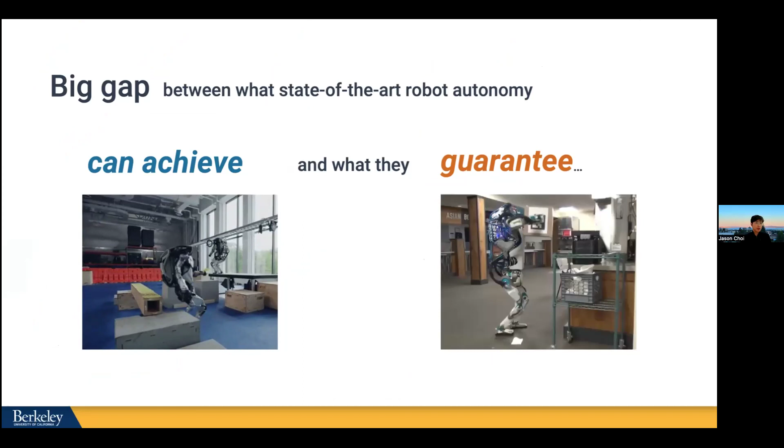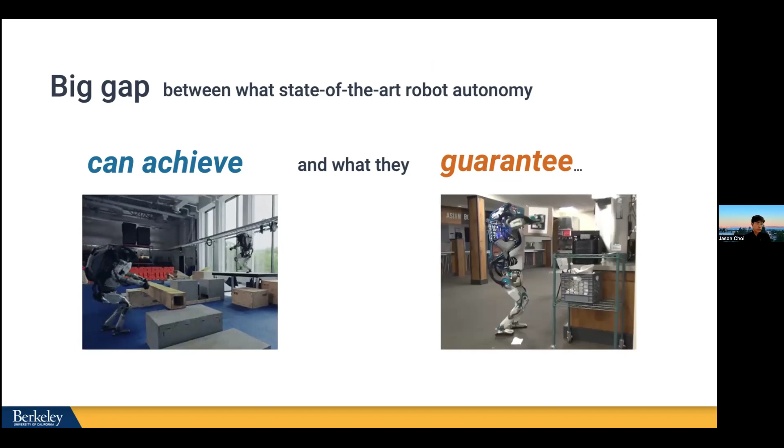I've heard that designing safe controllers is actually one of the main themes of your class, so I won't spend too much time on motivation. But I want to highlight that the main reason I investigate safety problems for robot autonomy is because state-of-the-art autonomy achieves a lot of cool tasks, but still lacks a lot of guarantees. It's a little unfair to use a Boston Dynamics video to highlight this, since it's a bit obsolete now, but it still makes my point: people spend a lot of time developing controllers for tasks that can be really versatile, but even then, we lack tools that provide rigorous guarantees for these systems. That's the main motivation for investigating safety problems in robot autonomy.

What is special about modern robot autonomy systems compared to classical control systems? There are many aspects—for example, interaction with the environment or other agents is also a central topic of Andrea's class. But today I want to highlight two points: first, that new robot autonomy usually deals with more complicated and uncertain dynamics, like robots or modern next-generation aircraft.

They also usually involve a lot of data-driven components in their pipeline. Data-driven components are more common for prediction and perception, but I think it'll be essential to incorporate them into the control or decision-making part of autonomy as well—I'll talk more about that later. But assuring safety for data-driven control methods is still an underexplored area, which is why research on providing safety guarantees for robot autonomy is a really challenging and timely topic.

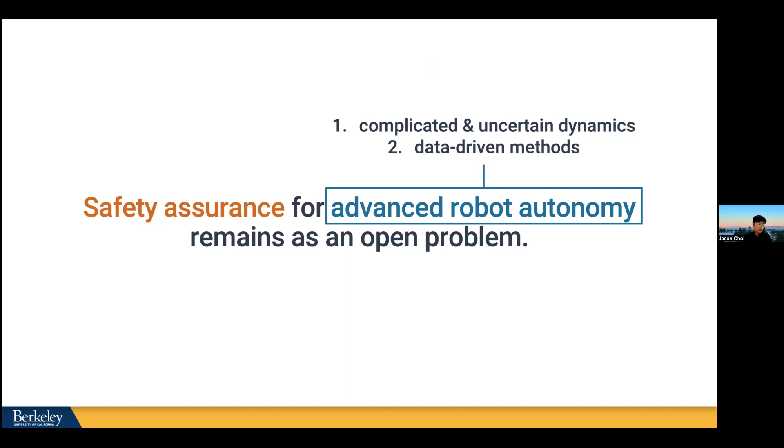My talk is divided into two parts. The first is more tutorial-like, and the second is more research-focused. In the first part, I'll go through various methods of control-theoretic design of safety filters, but due to time limits, I'll mainly focus on control barrier functions, since I've heard Andrea will be covering Hamilton-Jacobi reachability and has already covered that part extensively. CBF is also a very popular safety filter method these days that one can easily use, so I'll focus on it—not because it's my favorite method, but because I think it'll be useful for the class.

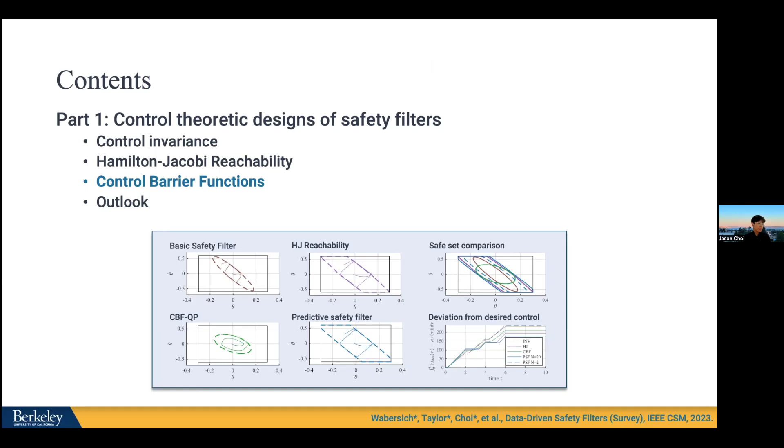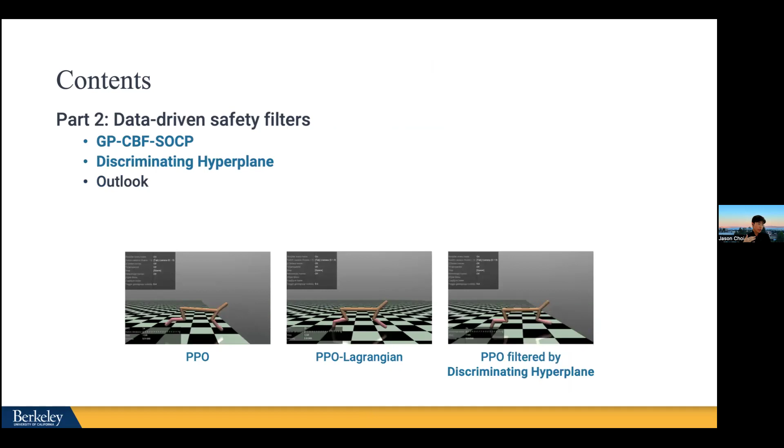The second part will introduce two specific data-driven safety filter designs I worked on during my research. One is based on Gaussian process regression, and the second is a notion called discriminating hyperplane that we recently published. This part will focus more on how we combine data-driven methods with safety filter design.

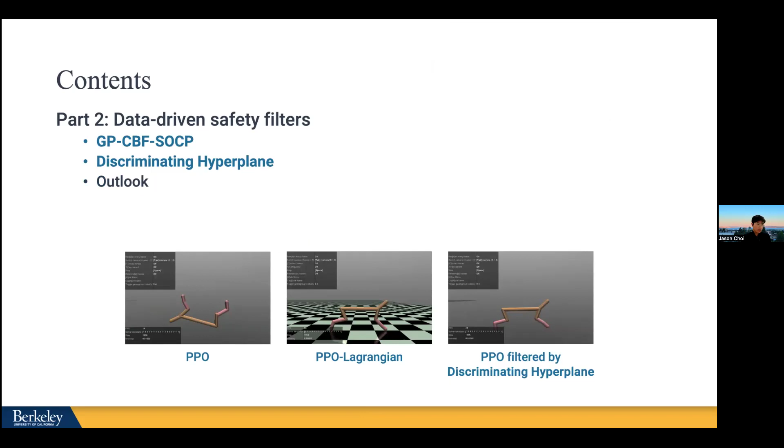The first talk will be on control theory design of safety filters, and this part will be based on the tutorial paper I wrote with my collaborators—Kim and Melanie from ETH, and Andrew and Professor Ames from Caltech.

So what is a safety filter? You all might already be familiar with this concept, but let me just recap.

A safety filter is a module in the control system that takes in the state information and the desired control information, and checks whether the desired control is safe or not. If it's potentially unsafe, the safety filter would override that desired control action with a verified safe action. That's the role of the safety filter.

The nice thing about this separated-out module concept is that it decouples performance and safety. If the designer tries to achieve performance and safety at the same time, it will complicate the design process a lot. That's why the safety filter simplifies the design process a little bit. The designer that focuses on the task controller can only focus on the task control, and the safety filter designer can only focus on the safety filter design.

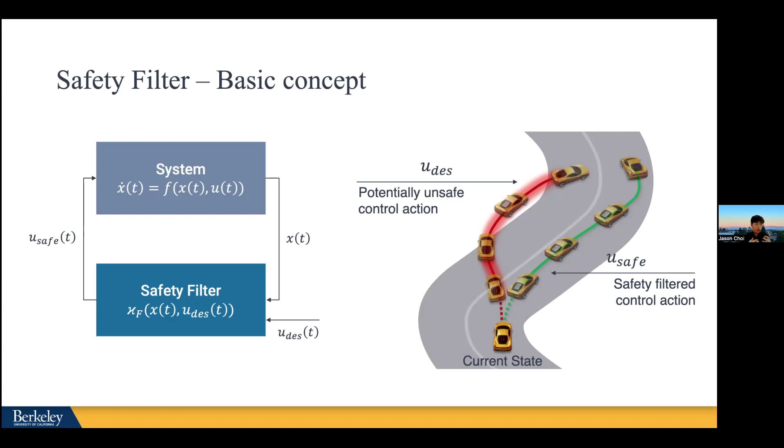I won't claim that this is an ideal kind of framework. There might definitely be situations where you have to consider performance objectives and safety objectives altogether. But at least in this talk, this is a framework that decouples the performance objectives and separates it out, so that we can focus only on the safety problem here. That's why we will mainly use the language of the safety filter framework.

This is a mathematically formal description of what the ideal safety filter would do. And of course, this is not the only objective formulation -- there can be many other ways of thinking about the safety filter problem. This is just one way of it, but it captures the core ingredients of the safety filter.

First, although it mainly tries to guarantee safety, it is a filter that filters the desired control. So there should be some notion that it should minimally deviate from the desired control. That's in our objective function here.

The control action that the safety filter selects should always be contained in the admissible control signal. And the most important thing here is that the trajectory should always satisfy the target safety constraint.

The main difficulty here arises from the fact that usually we don't know how long the trajectory should satisfy the safety constraint. In other words, the trajectory might have to satisfy the constraint indefinitely. Because we don't know exactly the time horizon, this could become an infinite time horizon problem. So how, in what domain, we can guarantee safety for this infinite time horizon will be a crucial problem to solve when designing these filters.

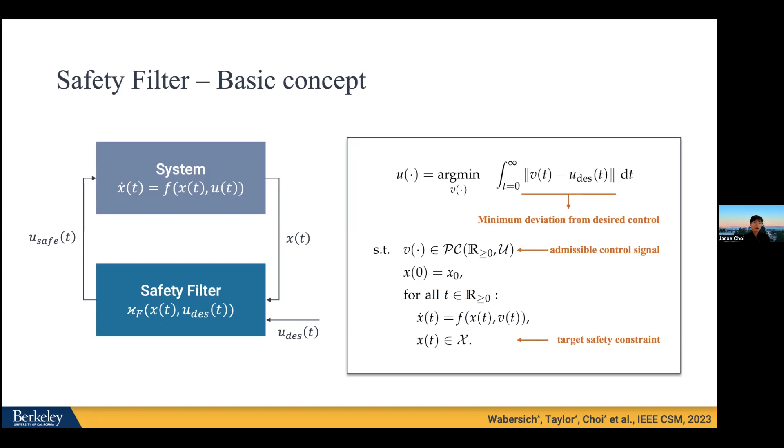Before I move on to the next part, is everything clear with this kind of definition? Okay, the students are experts -- they're good. Great, nice.

So we can think about the filter design problem as having two components. The first component is the safe set synthesis. The main challenge arises from the fact that we specify a target domain where our robot state wants to stay inside. The problem arises because not all states in the target domain are safe.

If you've already learned about reachability, I guess you understand why this is. There are parts of the state space where, if you start from there or end up there, you will inevitably always reach the failure region, whatever you do with your control action. So we have to rule out those regions -- we have to define or verify a subset of the target set that is safe. That's the domain problem.

And once we verify this safe domain, we of course have to design a control signal such that the trajectory under that control signal will actually stay inside that domain.

I see some thumbs going up. Is it Andrea, or is there a question? Any questions? Okay, I think we're good. Nice, I saw some thumbs up on that screen, in that view.

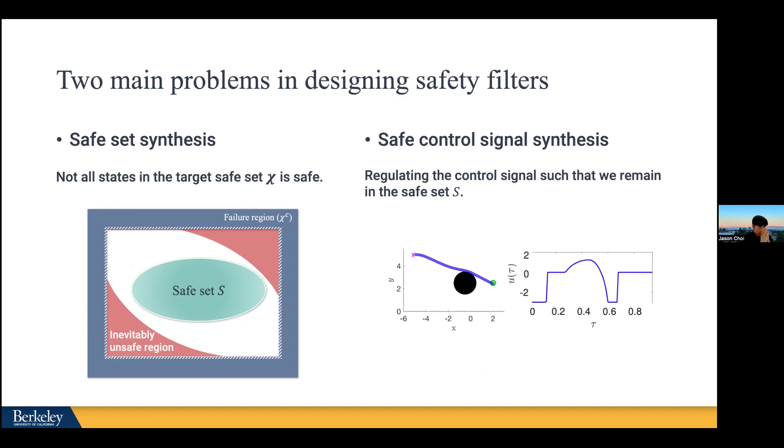So I'll talk first about the safe set synthesis, and again you might already be familiar with this concept, but let me just quickly recap. Usually, because of the infinite horizon nature, we want to verify a domain where the trajectory can stay indefinitely for a long time. Such a set is called an invariant set, and this is the core concept for safety filter design.

The forward invariance definition is that a set is forward invariant if for any initial state inside the set, you roll out the trajectory and the trajectory stays indefinitely inside the set. If a set satisfies this property, it is called forward invariant.

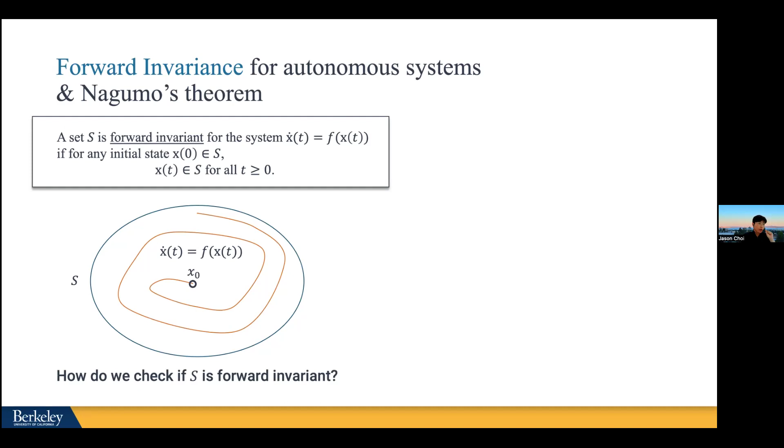Since we have to check every initial state, it might seem like this is a very difficult condition to check given a set. So how do we check the set is forward invariant? Actually the answer is not too tricky. We don't have to check everywhere inside the set, we only have to check at the boundary condition of the set.

We use a distance-like function h to do this. Let's say we constructed the distance-like function of the set, so that the set S is the zero super level set of this h function. Then if at all points on the boundary, h dot along our dynamics is greater or equal to 0, then it means the trajectory following our dynamics will never go below 0 where h is 0. So the h value along our trajectory will always be positive. In this way, we can easily check the condition of forward invariance.

We will similarly extend this notion to the control system. Here I'm introducing this notion for an autonomous system where there's no control signal, but if you go to the control system, we extend this forward invariance notion to the existence of the control signal. For any initial state inside the set S, if there's a control signal that drives the trajectory to stay inside the set indefinitely, then the set will be called control invariant, meaning anywhere from inside the set, you can always make sure you can maintain the trajectory to stay inside the set.

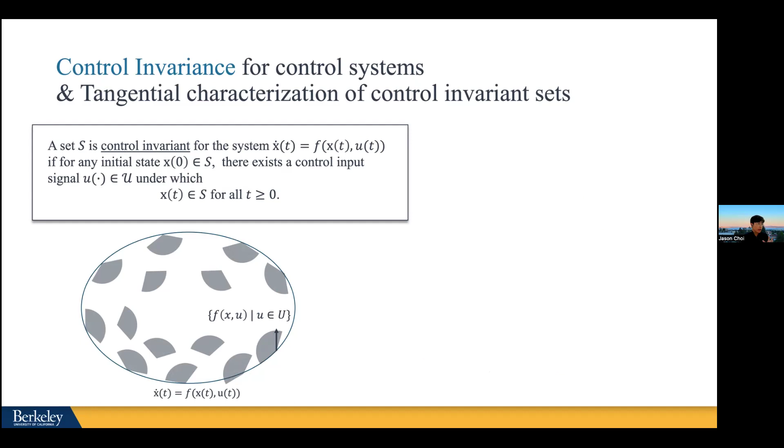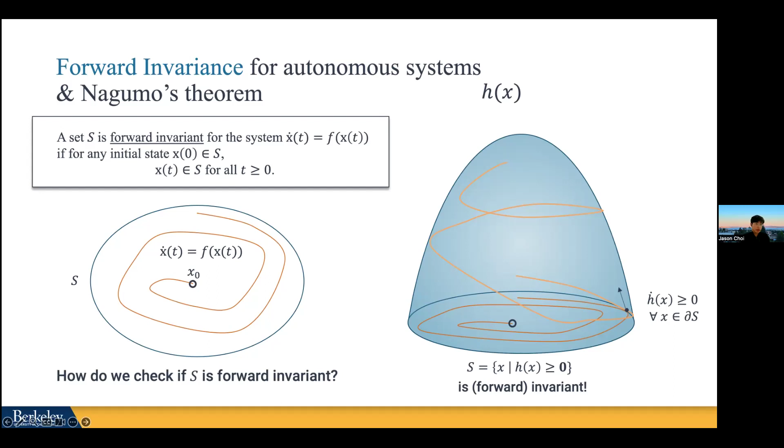The condition I described before — I'm not sure if I mentioned the name of the theorem — this is called Nagumo's theorem, that all you have to check is the boundary condition that h dot has to be greater or equal to 0. You can similarly extend that notion to the control system. The only difference now is that instead of h dot always satisfying greater or equal to 0, you just have to check the existence of such control input at the boundary. If this condition is satisfied, you can guarantee that whenever the trajectory hits the boundary, the control satisfies this h dot condition, and therefore it remains inside the super zero level set of the h function.

So it seems like this h function is really important, right? And if you can find such an h function, that naturally also gives us a good way of constructing a safety filter design.

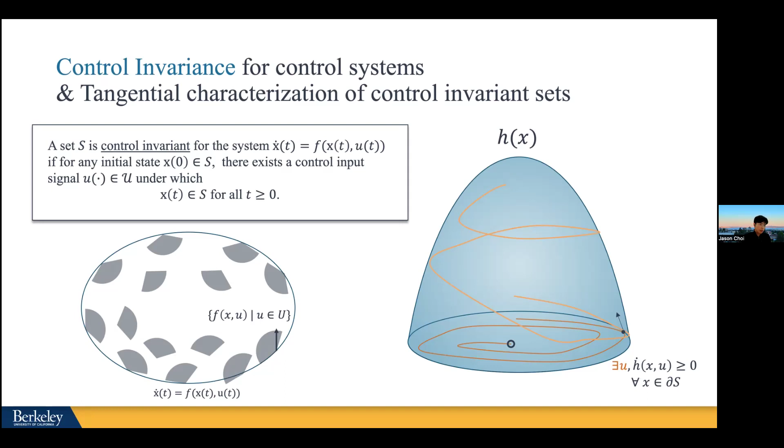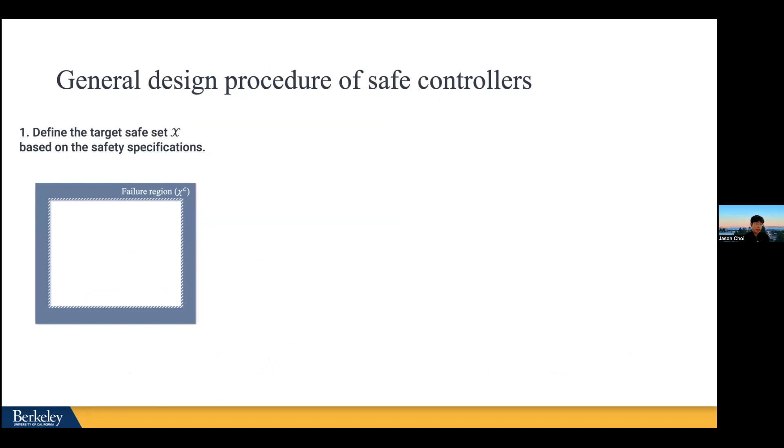So a general procedure of how we design a safe controller or safety filter is first we get this safety specification — in other words, the target region where we want to stay inside. This is the white region here in the figure. Then we'll verify a control invariant set contained in this set X. This control invariant set will be called S in my talk, and this is the safe domain that we verify to be safe, and we want to stay inside that set forever.

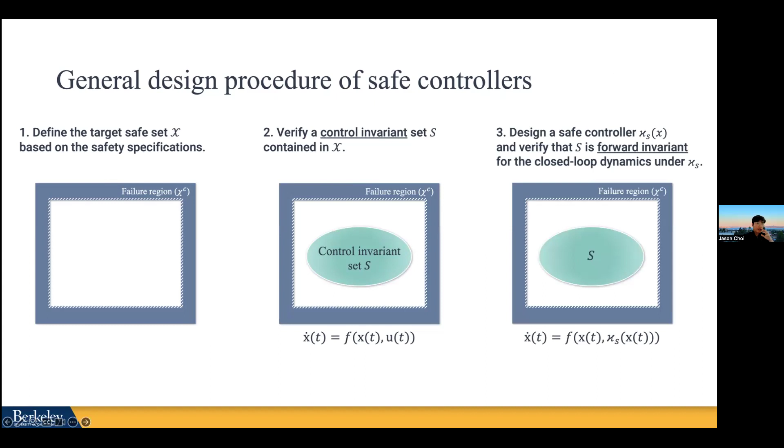Once we verify this control invariance of the set, we'll design a safe controller associated with this set so that the closed loop dynamics under that controller will render the trajectory to be forward invariant and stay inside this set. So this is almost the most generic pipeline of designing the safety filter.

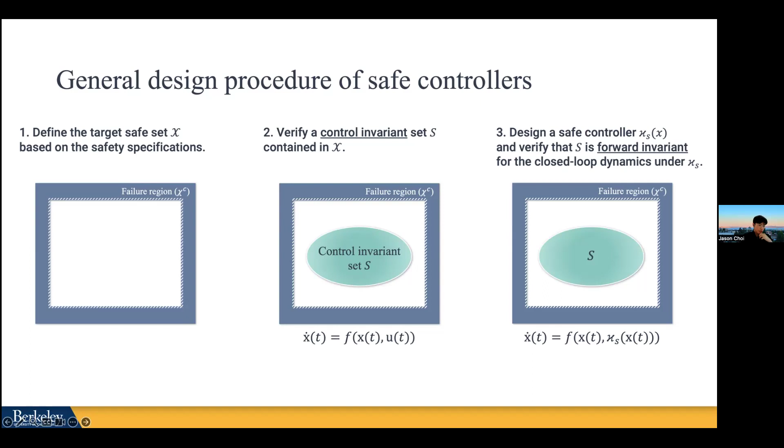I think you learned one method of doing this, which is Hamilton-Jacobi reachability. I'll go to that part, but I'll give you just a quick overview because I want to spend more time on the CBF stuff. Reachability is a very systematic way of constructing such a safe set. How do we do this? We define our failure region, the outside of the target set.

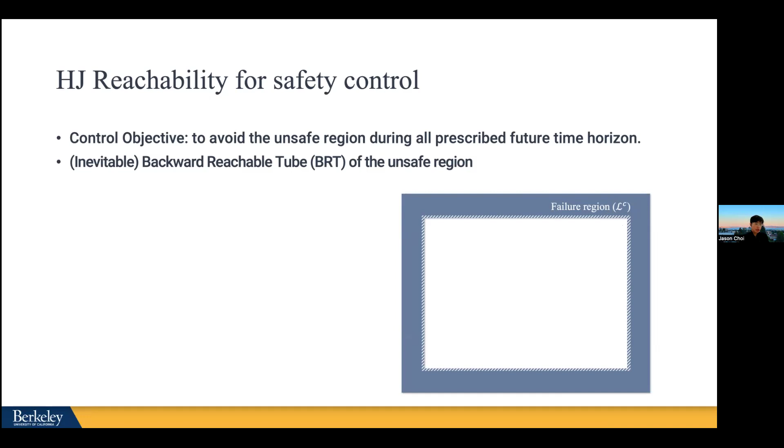This might be a little bit confusing, but we define this as our target set. This white region is our desired state region, and we define the failure region as our target set. Then we compute the backward reachable tube of this failure region. So we set this target set and then compute the backward reachable tube. From anywhere inside this backward reachable tube, no matter what you do with your control, it'll inevitably hit the failure region.

That's why I call it an inevitable backward reachable tube. Once you compute this inevitable backward reachable tube, the complement of this set is called the finite time viability kernel. This finite time viability kernel is the region where there always exists a control signal that can guarantee not to hit the failure region. And if you do it for a long enough horizon — I'll skip all this part.

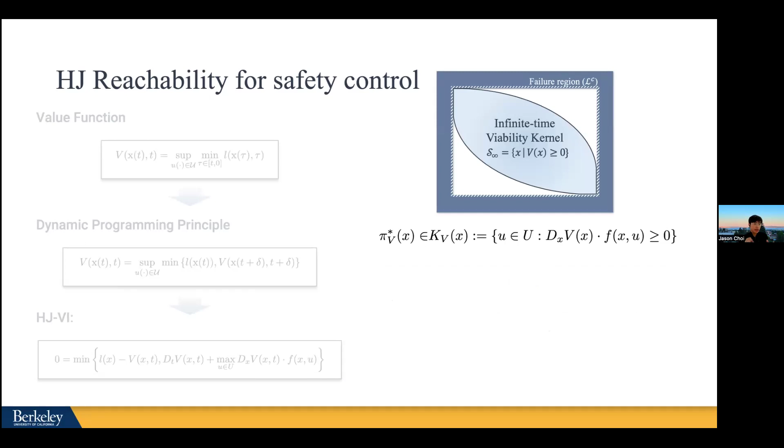You will get an infinite time viability kernel, which will be the maximal control invariant set contained in your desired state region. Jason, can I quickly interject?

If you remember, when I defined the BRT and we did the dynamic programming principle, so far I was always talking about 0 to big T as the time horizon under which we compute, but you can run big T to infinity. And under certain conditions, your value function converges. This is what Jason is describing here. You get a value function that no longer depends on time. It's a really good point.

So actually, convergence is an issue here, but I won't talk too much about that today. But you have to make sure that the value function converges, so that it doesn't have the time notion anymore. And if the value function converges, then the 0 level set of this value function will give you the maximal control invariant set. So now you've got your safe domain.

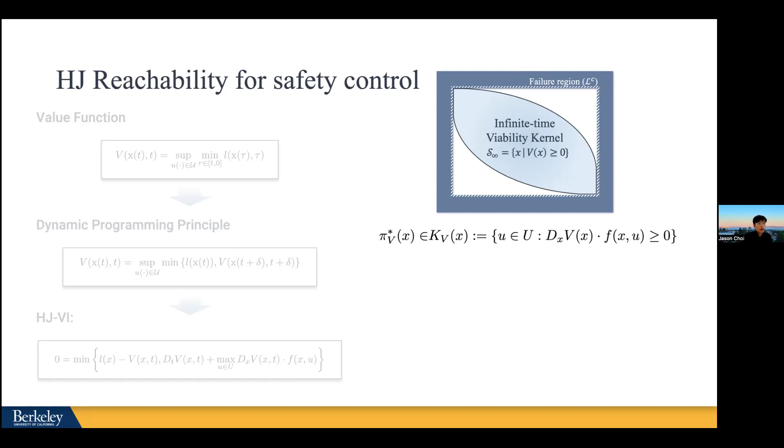And you can design a least restrictive reachability safety filter based on this. Basically, this safety filter allows the desired control signal to do whatever it wants, as long as it is strictly inside the verified state set. But then if it's very close to the 0 level boundary, it switches to our reachability optimal control.

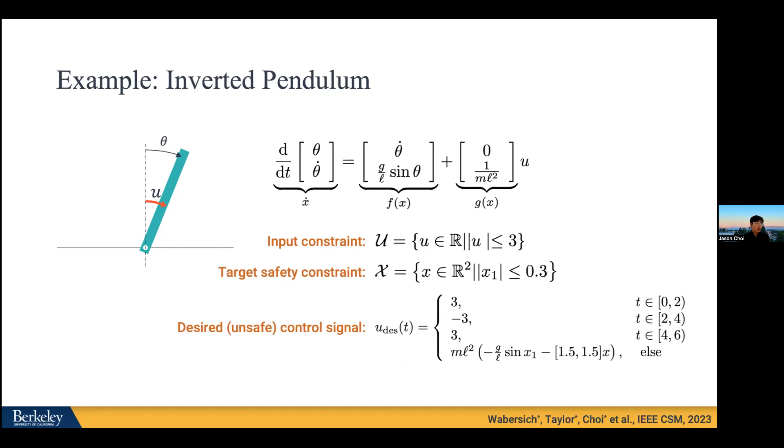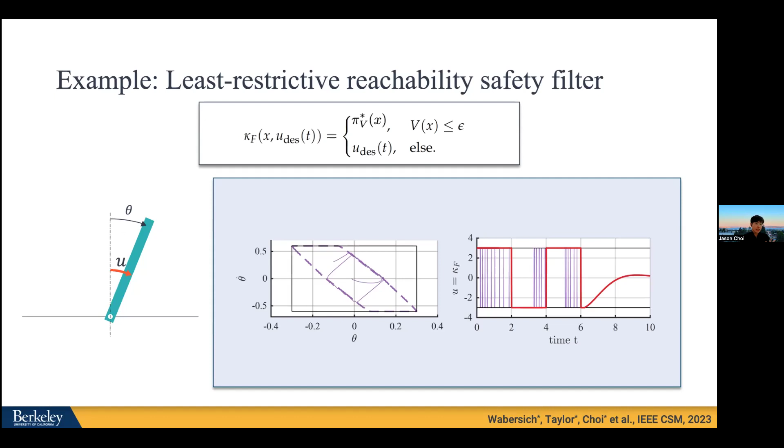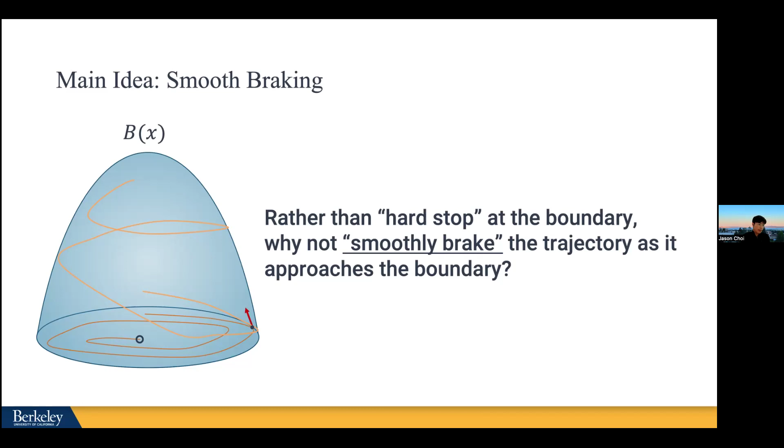So rather than impose a hard stop condition at the boundary, like overriding with our optimal safety control at the boundary, or we smoothly brake the trajectory as it approaches the boundary. That's the main motivation for the CBF-based design. And you can actually do that with this kind of comparison principle.

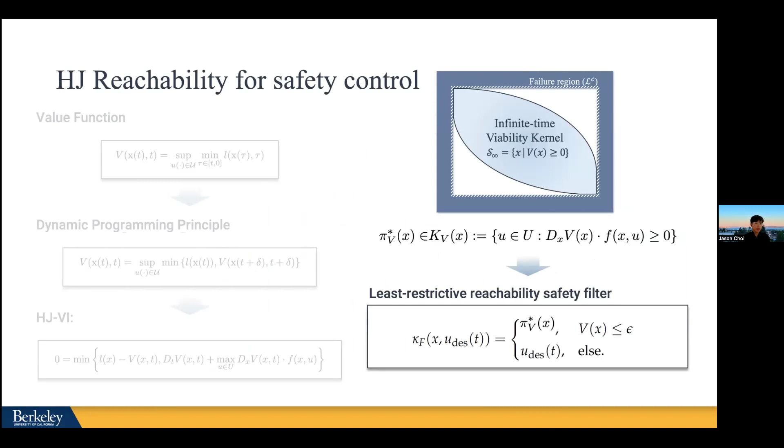That equality condition gives an exponentially decaying curve. So if the trajectory started from a positive value, this trajectory will always stay above this exponentially decaying curve, and therefore always be a positive value. And since our safe set is a super zero level set of the CBF, it'll always stay inside our safe set.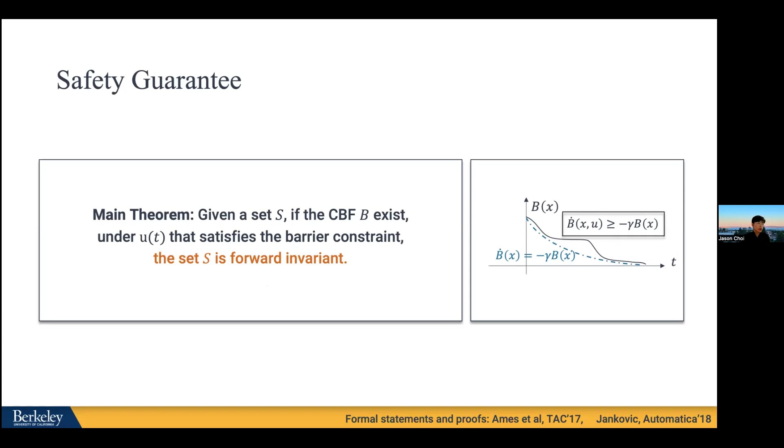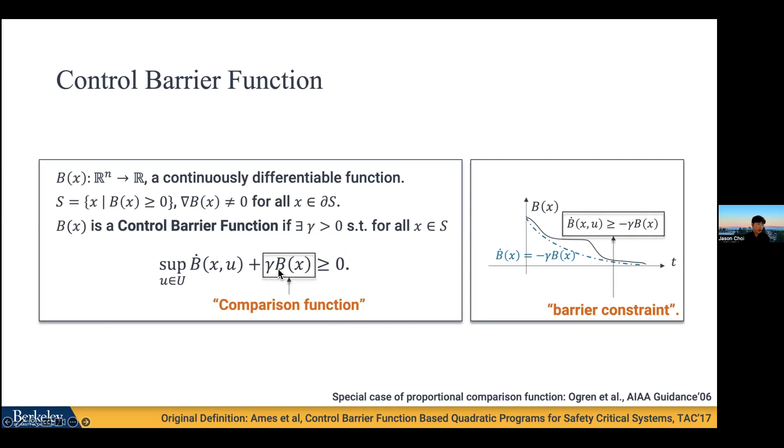So the main theorem is basically just what I said: if there's a valid CBF, and if the control signal satisfies these barrier constraints every time, then the set will be rendered forward invariant under this control signal. I'll skip the proof, but it's actually derived from the Nagumo condition, because this boils down to the same Nagumo condition when the value of B becomes 0.

Let's see one specific case where the dynamics is affine in control. This affine form of dynamics is very common for a lot of robotic systems because we can derive the dynamics of robots from the Euler-Lagrangian equation like this. The F term is called the drift term, and the G term is called the actuation term or the control vector field.

So if our dynamics is control affine like this, the barrier constraints will have a structure that is affine in U as well. If we incorporate that as a constraint in a min norm control objective, this becomes a quadratic program, and a very compact one compared to predictive control, MPC. These compact quadratic programs can be solved super fast in real time, and that's one of the reasons why CBF became really popular these days as a safety filter design mechanism.

Just a quick notation in case you're not familiar: L_F B means the gradient of B times our dynamics, so this is a Lie derivative, which also appears in the Hamiltonian of reachability. So L_F B plus L_G B is the evolution of our barrier function along our dynamics. This is actually a little important for later because you can see we use the information of our dynamics, F and G, to construct this barrier constraint.

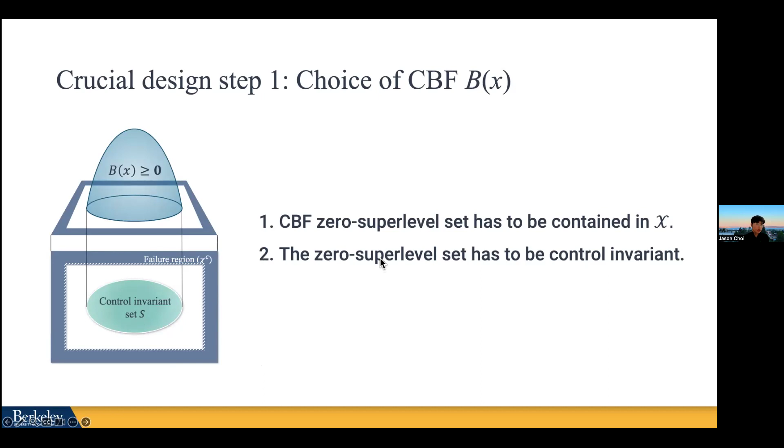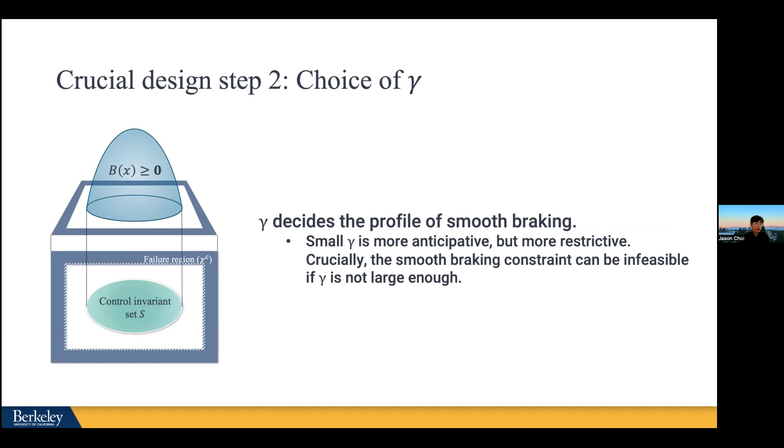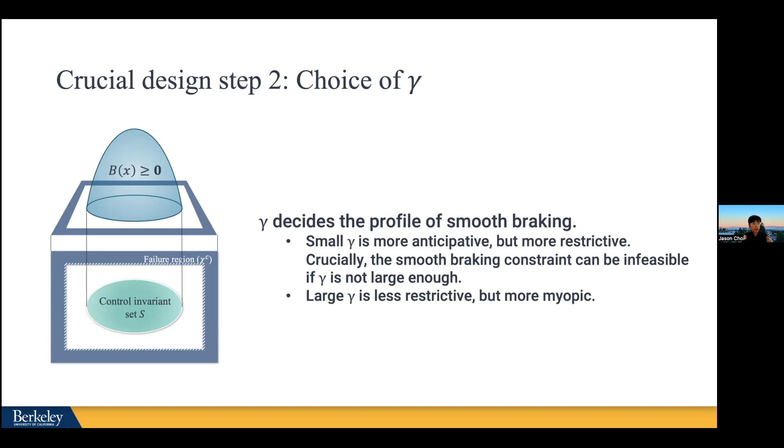The second point is that the value of gamma we choose kind of decides the profile of the smooth braking. If we use too small a value of gamma, the braking would kick in earlier, but it might be too restrictive. Whereas if we choose a larger gamma, it might be less restrictive, but as it approaches the boundary, the filter might kick in too aggressively. You will see that behavior in a minute.

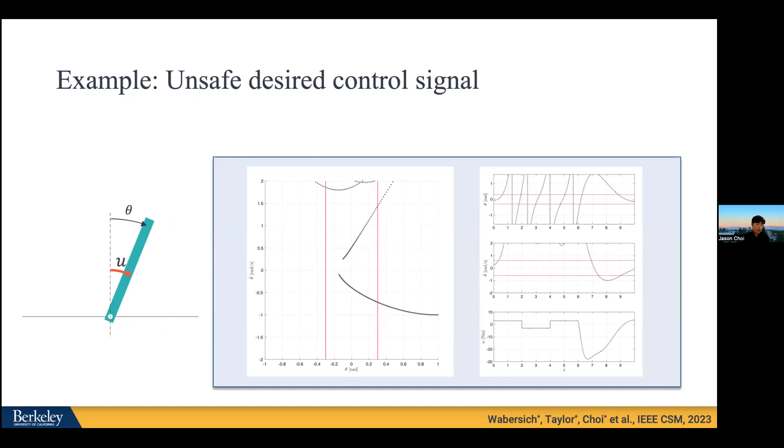So here we come back to this inverted pendulum unsafe control signal example. Now we design a CBF here following a very Lyapunov-like method. We use this quadratic form of the control barrier function, and we check whether the CBF constraint will be feasible or not, and based on this checking, we can determine valid parameters for this design, A, B, and the gamma value that makes the CBF valid.

This procedure can be done more generically using an optimization formulation, but I will not go into that today. Here you can think of this as some Lyapunov-like function. A Lyapunov function looks like a bowl shape, so you flip it and make an offset so that the zero level set emerges, and we can use that zero level set as our control invariant set. Now, we choose a small gamma value here, 0.2.

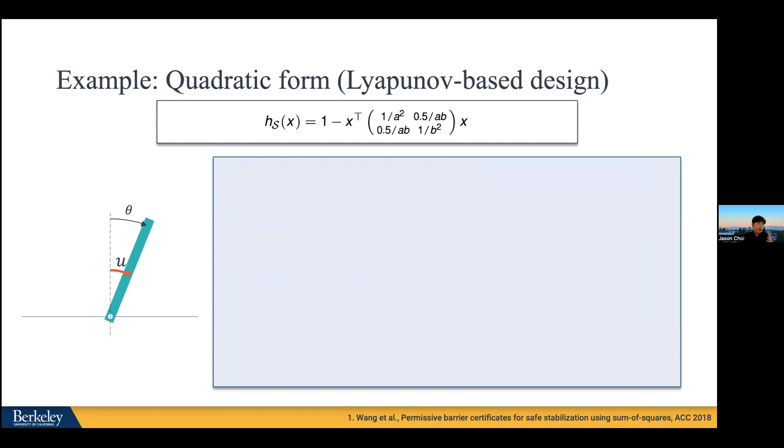Yeah, we design H in such a way, and that's a good point, because if you have a control bound, then designing the CBF becomes a much more challenging problem. There are ways of still incorporating those bounds into your optimization program that designs the CBF, so that's what we did here too. But it is definitely more challenging than when there's no control bound. Going back to the definition of the CBF, all you have to make sure is that this LgB value doesn't vanish. If the LgB value doesn't vanish, you can take a big enough input U so that you can always satisfy this condition. That's why for unbounded systems, CBF design works beautifully.

Actually, I have a question, to be a little spicy. How do you comment on, for the bounded case, designing a non-trivial H versus in reachability where you compute the value function—which one is harder? Because the whole argument is that CBF makes everything easier, but it turns out you transfer the burden to designing a non-trivial H function. Could you comment on that? I think it might be helpful for a student to understand the trade-offs.

Yeah, you got me. So a really nice thing about CBF is you ease the filter design part a lot. But actually, the hard part is in how we design the CBF itself. You got it correctly. And especially if we have a control bound, this becomes a non-trivial problem.

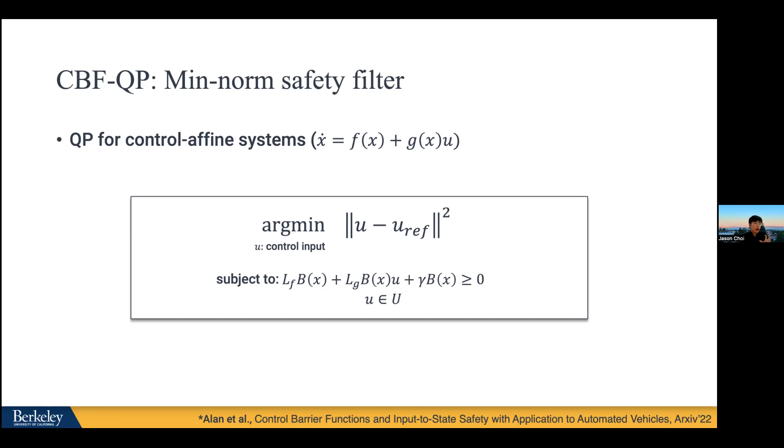So that's one way. The other way is actually doing reachability and using a reachability value function as a CBF. Reachability gives you a very systematic way of designing this value function that satisfies the safety constraint and the input bounds. So actually, control barrier function, if you have input bounds, can be seen as a function very similar to the reachability value function. And in fact, you can use the reachability-based formulation to compute the CBF.

I see a question in the audience. So I have a question on the comment of using the HJ value function as a barrier function. That value function isn't necessarily differentiable everywhere. And since you need to differentiate the value function in order to compute the CBF, in practice does that matter? Or in what cases will it break the controller?

You got me again, so you're right. The differentiability is definitely an issue in reachability, but it's something we don't talk much about in the reachability community because it's really hard to tackle. There are certain cases where we can still design a safe controller even on the non-differentiable boundary using a notion of subgradients or supergradients - a more generalized version of gradient for non-smooth functions, and we can use that notion.

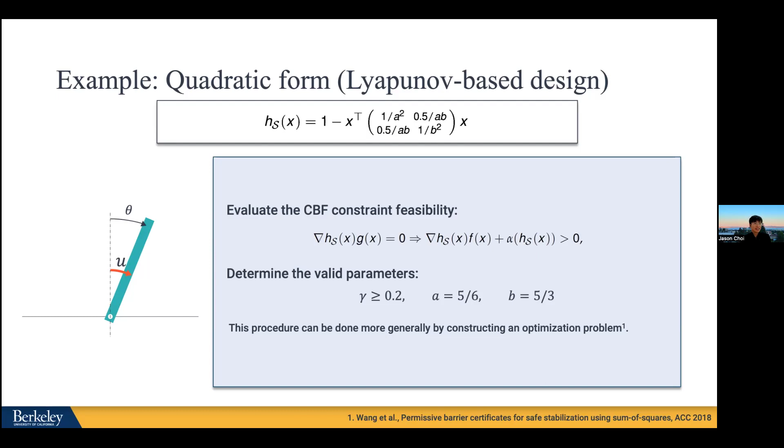Actually, I have a recent paper that talks about this issue in a more rigorous way. I'll give you the pointer to that paper in the last part of my talk later. I'm really surprised that you guys are asking these questions, because these are very important technical details, but they're details I can't go into too much depth on in this kind of tutorial-like session. That's why I didn't talk about it, but you're definitely right.

Okay, really good questions. So let me recap CBF and reachability. There are three main approaches in the community for safety design. There are other approaches as well, but I think these three methods are the most popular these days.

The common theme of Hamilton-Jacobi reachability and control barrier function is that they both use this notion of a scalar function. In reachability, this is the value function, and in CBF, it's the CBF itself. This scalar function captures our desired safety constraint and how the long-term effect of the dynamics would affect our system in satisfying this constraint. These two pieces of information are combined into this scalar function, so the level gives us a measure of how far we are from the safety margin, and the gradient gives us information on which direction we should drive our system state to ensure safety.

This is the core principle of both reachability and CBF. In reachability, the zero level set is our maximum safe set. In CBF, our zero level set is our control invariant set. In reachability, we use the gradient to synthesize the optimal controller. In CBF, we use the gradient to synthesize the barrier constraints that the control input should satisfy.

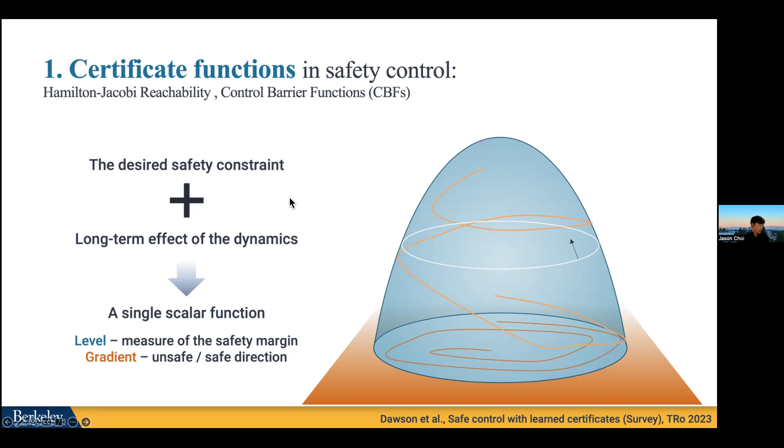Now, I'll not go into predictive control today because of the time limit, but predictive control doesn't use this notion of the scalar function. Predictive control formulates an online optimization problem that is a finite time horizon problem, and it incorporates a set of safety constraints that work together to guarantee safety. But it's a finite horizon problem again. So if it's a finite problem, how do we ensure infinite horizon guarantee? That's the core design principle of predictive control.

So besides our target safety constraint X, you impose a terminal constraint - the trajectory at the final horizon should always stay inside our terminal set S, and this terminal set S is designed to be invariant. In this way, all trajectories always have to end up in the control invariant set. Once it ends up there, for the later horizon, you can always stay inside the set. That's how you impose this infinite horizon safety guarantee in predictive control as well.

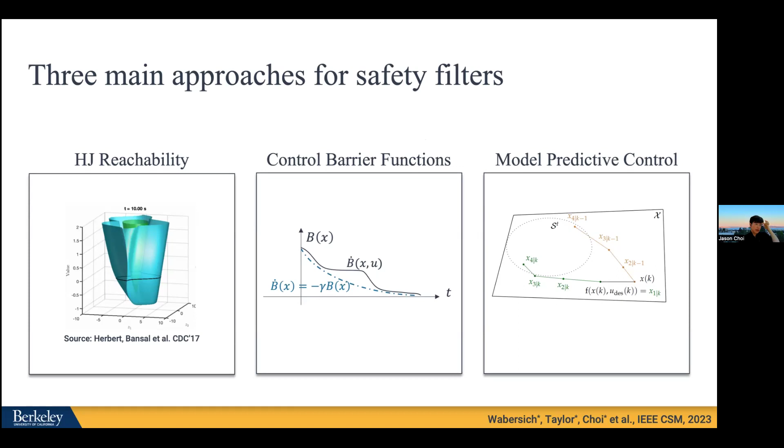So if we sum up all these principles in each method, there arise two commonalities. The first common aspect is that all these methods use the notion of control invariance, and constructing a good control invariant set is the core design step of all methods. In reachability, we explicitly construct the maximal safe set, the control invariant set, from our value function. In CBF, this is connected to how we design the CBF. In the predictive controller, this is connected to how we design the terminal set.

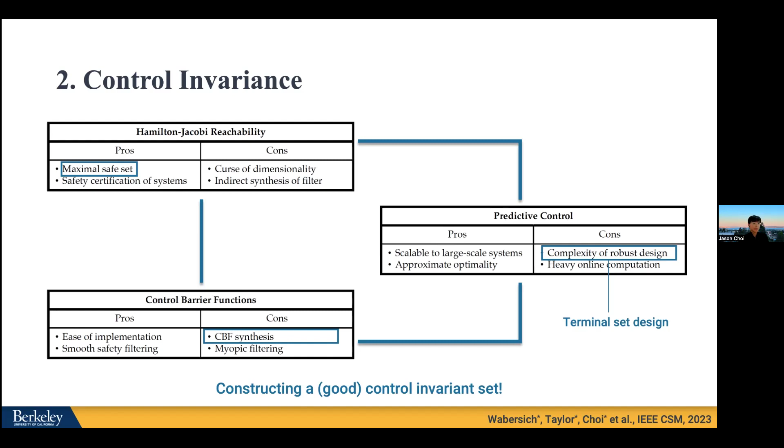Now we will start to think about how this model-based design will apply to scenarios where the model is inaccurate. In all this design process, we use this dynamics information, the F function. We use it in our reachability computation, in our barrier constraints, and in our MPC dynamics constraint. So what if this dynamics is wrong, if it contains error?

All these methods have their own extension to make sure that the design is robust to this error. Andrea, have you taught the differential game formulation? Yeah, we've discussed that. Yeah, nice.

In reachability, there's a formulation where instead of considering the problem as an optimal control, we consider it as a game between the control and the disturbance. And in the CBF, there's a notion of input-to-state safety, which ensures that our trajectory under a bounded disturbance stays inside some safe set with an additional margin.

And in the MPC, there's a technique called constraint tightening. We add up the uncertainty effects of the dynamics over our time horizon, and then make sure that the constraint is tightened and satisfies safety even under those additive uncertainties. So robust design is the main mechanism of dealing with the error, and this principle will be extended to the data-driven design of the safety filters in my second part of the talk.

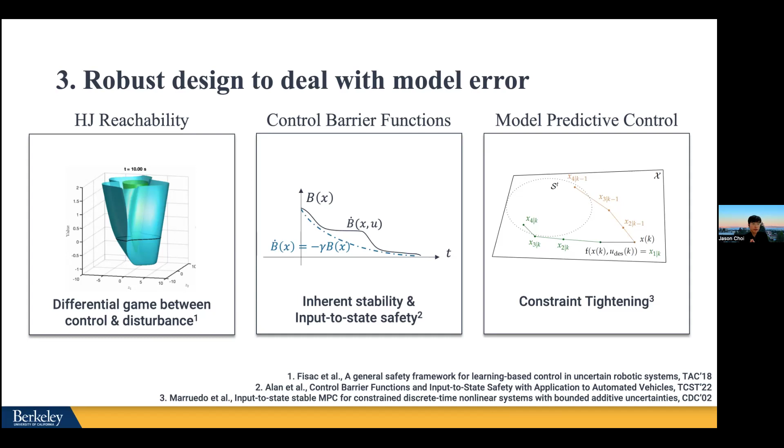Okay, so now we're in the second part. Andrea, how much time do I have more? You have, let's see, like 35 more minutes in total. Okay, I'll try to finish within 20 minutes. Yeah.

Now why do we want to combine with data-driven methods if this safety filter design works very well? This model-based design will fail when the model is wrong, as I said, and more complicated robotic systems these days involve a lot of uncertainty in the dynamics that is hard to model accurately.

These days I work on air taxis, the eVTOL vehicles, aerial vehicles that involve change of configuration. The aerodynamics this vehicle involves is really, really complicated. The lift profile and the drag profile are really hard to model accurately. So we need to learn from data how they would behave.

I would say the problem is slightly different from just learning the dynamics, because from the safety aspect, we not only have to learn the dynamics itself, the uncertainty in the dynamics, but we have to learn how the uncertainty affects our safety constraints. That's kind of the core thing that is different from learning-based control or learning-based dynamical models.

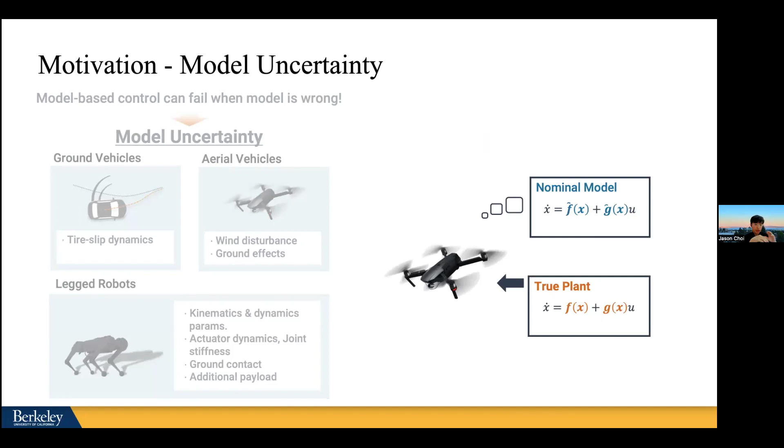Here we'll operate in a setting where the true plant is described by this control-affine dynamics, x dot equals f(x) plus g(x)u. But we have a mathematical model that is f-tilde and g-tilde. Of course we would try to come up with a model that could describe the true plant as much as it can, but there will still be some gap between f and f-tilde and g-tilde.

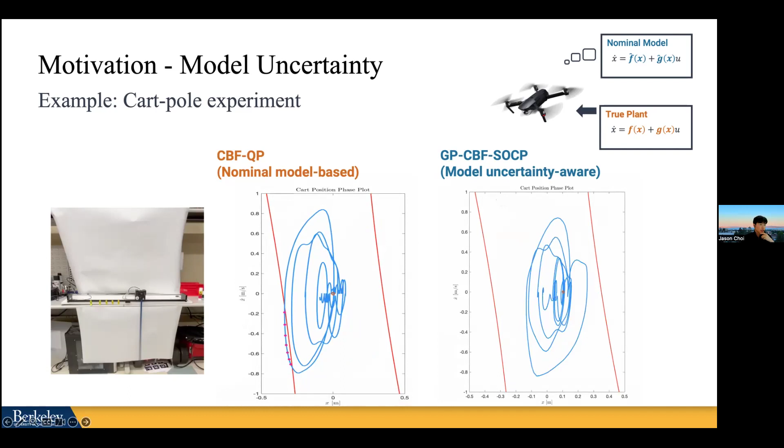So let's see how we do this. Oh yeah, by the way, I worked on this with Fernando and Wonsuk and Bika.

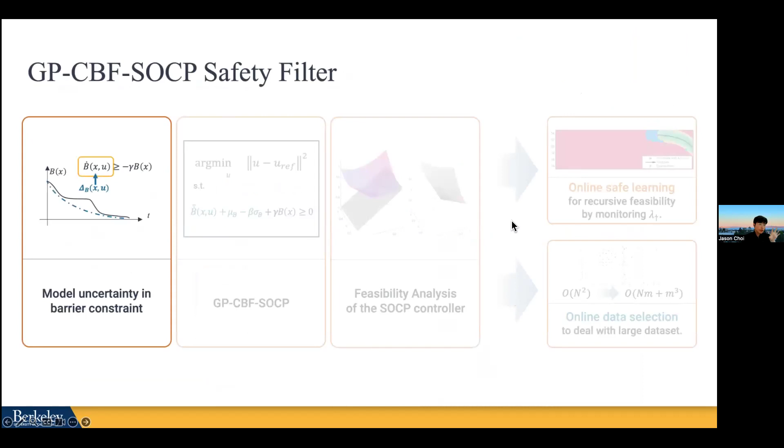So we'll start with how the uncertainty affects our safety constraint. In the CBF filter, we go back to the basics and see that the barrier constraints incorporate the knowledge of our dynamics. The B dot is LFB plus LGBU.

But the true plant dynamics F and G is something we don't know. So in reality, when you design the filter, what we use instead is LF tilde B and LG tilde B, the model-based estimate of our Lie derivative of the barrier function. So there's a mismatch between the actual Lie derivative and the model-based estimate, and that mismatched term is called delta. This is the uncertainty term that is affecting our safety constraints.

So the main idea of this GP safety filter design is if we can learn this uncertainty term, and if we adjust this uncertainty term in our constraints, then we'll be able to recover the safety guarantee of the filter.

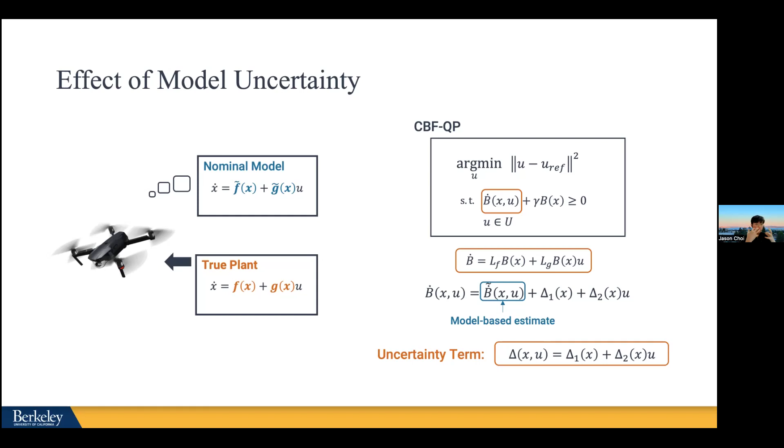For this, we'll use Gaussian process regression. There are many benefits of using Gaussian process regression compared to neural networks, and there are also downsides. But the benefit we were excited about is that it is much more data efficient than neural networks. Moreover, it provides a probabilistic bound of its prediction.

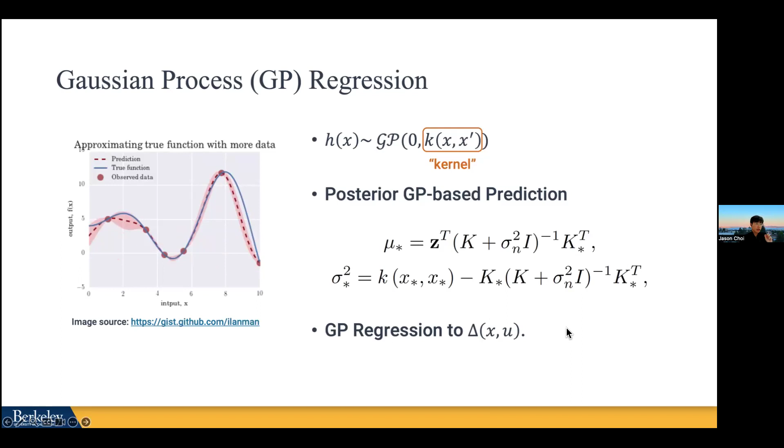So in the plot, when it provides an estimate of where the target function would lie, it also provides a variance term together, so that based on that variance term, we have a confidence of in what probability the true value will lie inside. That is called the confidence bound of the Gaussian process regression.

So once we collect the data and construct a GP model for this uncertainty term, with high probability of 1 minus delta, we have a guarantee that the true unknown value of this term will stay inside our mean value mu, plus or minus some constant times sigma, which is our standard deviation from the GP regression. We can use this information to make sure that our safety filter or constraint is robust to the error that the GP prediction can make.

And in the CBF setting, having a lower value of the CBF value is at more risk of violating safety, or it's closer to the safety boundary. That's why we consider a lower bound of the CBF value.

So with this GP confidence bound, we have a guarantee that our true CBF value is larger than or equal to our model-based estimate plus the lower bound of the GP prediction of the uncertainty term, with a probability of 1 minus delta. Based on this, we can construct a chance constraint for the barrier constraints.

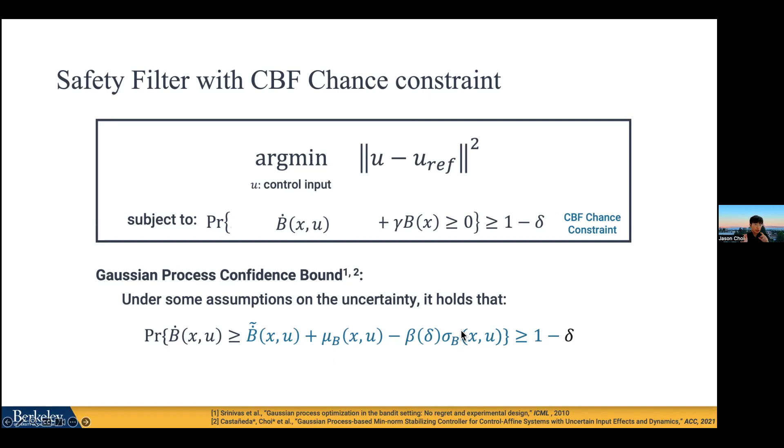When you do this, we have to be careful, because the original CBF constraint is a linear constraint in U, which is why the original filter is a QP filter. But if we use a naive, vanilla GP regression, then this mean term and sigma term will not contain this nice structure that is affine in U.

So what we did in our work is use the fact that the target function is also affine in U, the target unknown uncertainty is affine in U. We exploit a specific control affine structure in designing a specific kernel called the affine dot product kernel, so that the resulting mean term is still affine in U, and the resulting variance term is quadratic in U. With this specific kernel, the mean term will look like this, and the variance term will look like this.

So if we incorporate that into our chance barrier constraints, now we have this form where this term is affine and this term is quadratic, but with a square root. That becomes a second order cone constraint.

And a second order cone constraint is still a convex constraint, so it renders the feasible set to be a convex set, and the filter program becomes a second order cone program, which is still a convex program. It slightly takes longer than the quadratic program, but you can still solve this very fast with conic program solvers.

So maintaining the convex structure here with the specific kernel design was a core part that makes this filter feasible to be deployed in the real world.

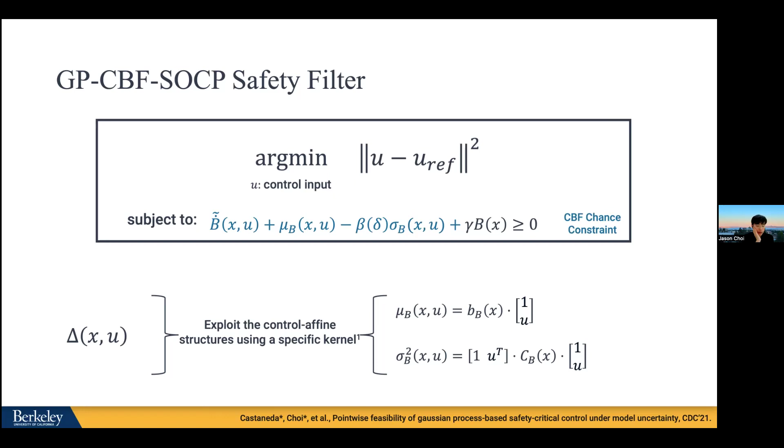So the downside I didn't mention before is that the GP doesn't scale very well with the number of data points. I'll first show you the cartpole experiment here, from the experiments I showed you before.

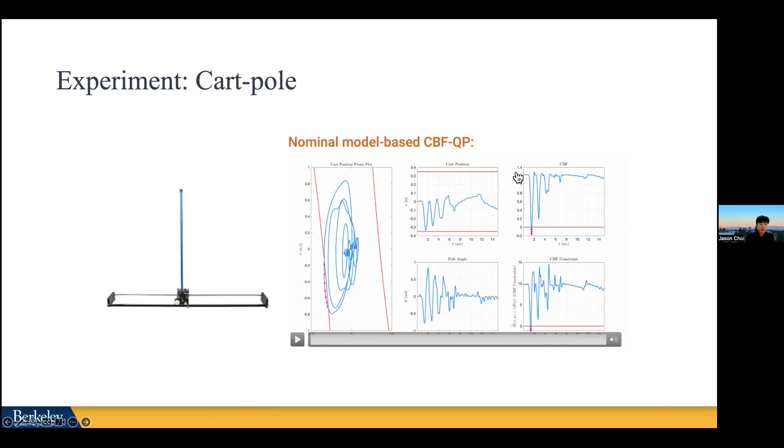I have some additional plots showing the CBF constraints based on our model-based estimate. If you evaluate whether this constraint was satisfied from our data, it was actually not satisfied, and that's why you see the CBF value dip below 0. With our GP-based safety filter design, we can see the CBF always stays positive—we recover the safety guarantee by learning the uncertainty from the data.

For this example, we collected 10 trajectories, and that's why GP is actually quite powerful compared to neural networks. But for more complicated systems like a legged robot, we have a 10D simulation in this work, and for that 10D system we had to collect at least 10,000 data points. That's when the GP inference starts to slow down a lot because of the limited scalability of the GP.

So what we can do is analyze, in the kernel feature space, what data point could provide maximal information about the safe direction. Using that information, in online inference we can select only a subset of data—we don't have to use all of it, only the data most relevant to characterize our safe direction. That's the main idea behind this paper called constraint-guided online data selection.

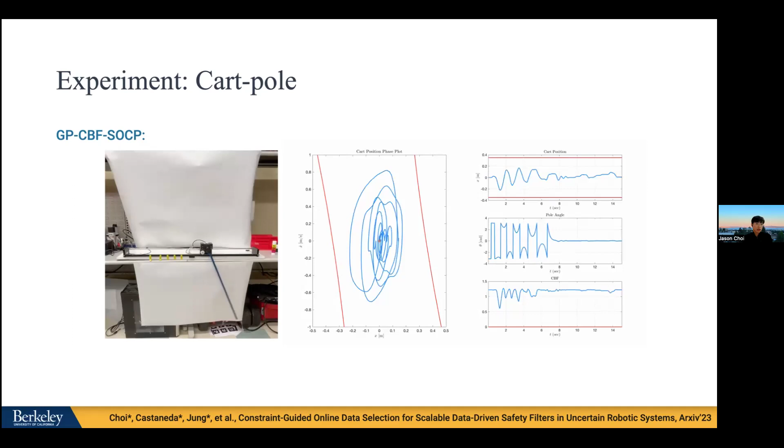That alleviates significantly the computational scalability issue of GP inference. That's again something I don't have time to go into the specifics of right now.

If you're more interested, these two extensions of the vanilla GP SOCP formulation cover the two questions you just asked. One is online safe learning—if the trajectory ends up in a region where you don't have enough data in your offline dataset, you can do online exploration while guaranteeing safety, augment that data, and guarantee recursive feasibility. The other extension is, because GP inference doesn't scale well with the number of data points, we do online data selection to improve GP inference time, so we can still deploy the GP SOCP filter online.

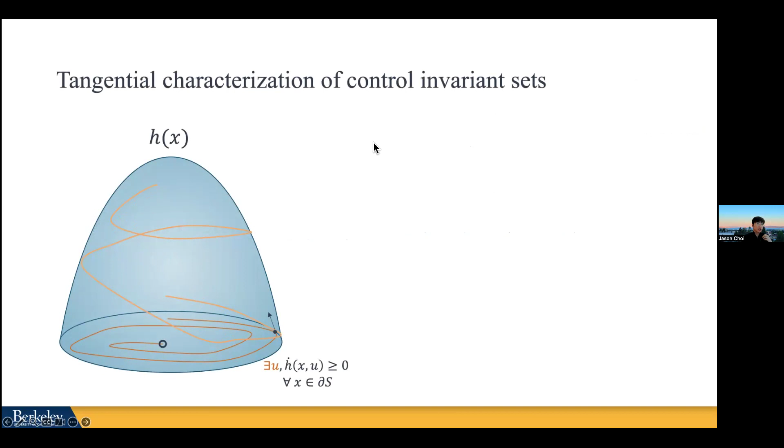To explain this, let's go back to the first part of our talk. We started our talk with reviewing what control invariance is and what the Nagumo condition is on the boundary of the control invariant set, to verify whether the set is control invariant or not. When I describe this condition, I use this distance function h, right? The motivating question of this work is: do we actually need this function h to design a safety filter?

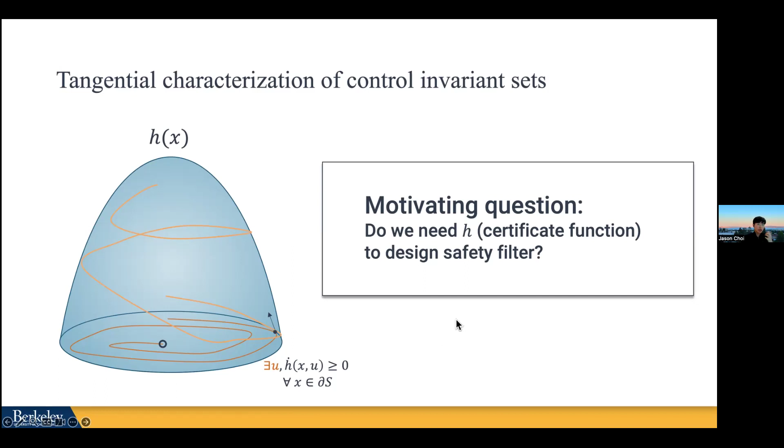All the design principles I explained today, the reachability and the CBF, actually use this function h. But do we actually need it? That was the motivating question for me. And why I was asking this question is because for the same safe set, we usually have multiple valid certificate functions, and that actually bugged me for a while. There's an example I'll show you that highlights this point.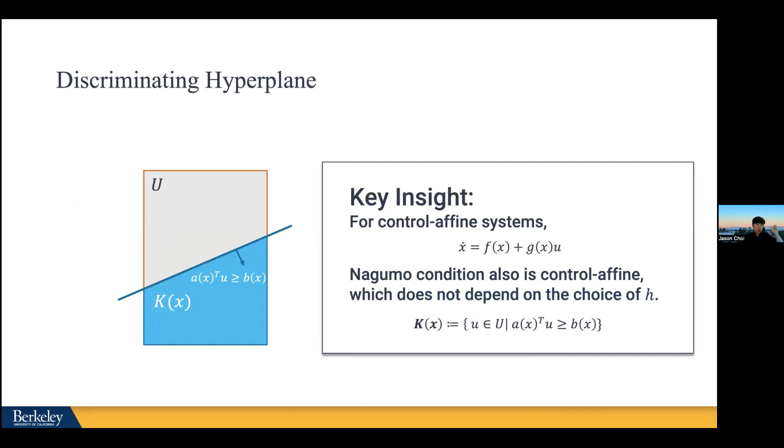So we have our control input bound, U in large U. And this Nagumo condition can be described as just some hyperplane-based constraint, A(x)U greater or equal to B(x). So this is just a hyperplane in our control input space that discriminates safe input from unsafe input. For safe input, the input will direct our vector field to inside the safe set, and unsafe input will direct it outside of the safe set. So the definition is just that it's the hyperplane in the control input space that discriminates safe and unsafe input, and this is the minimum structure that provides a sufficient condition for Nagumo's condition.

So no matter what H function we use, or even if we don't use such an H function at all, if you can directly learn the A term and B term, that's all we need to design a safety filter. So that's how we came up with a new way of designing a safety filter for this work.

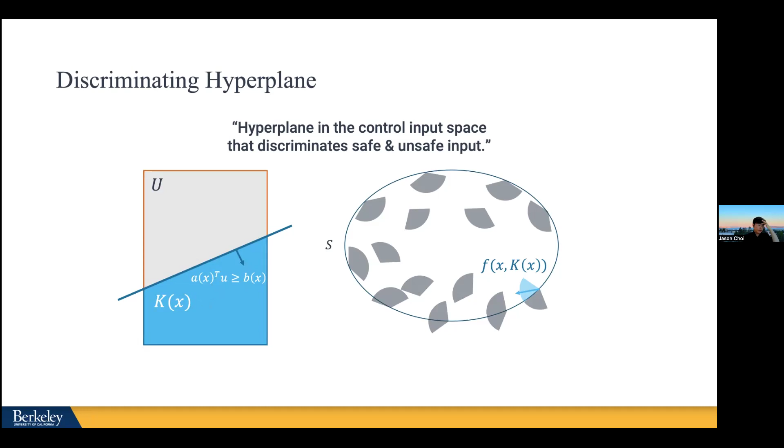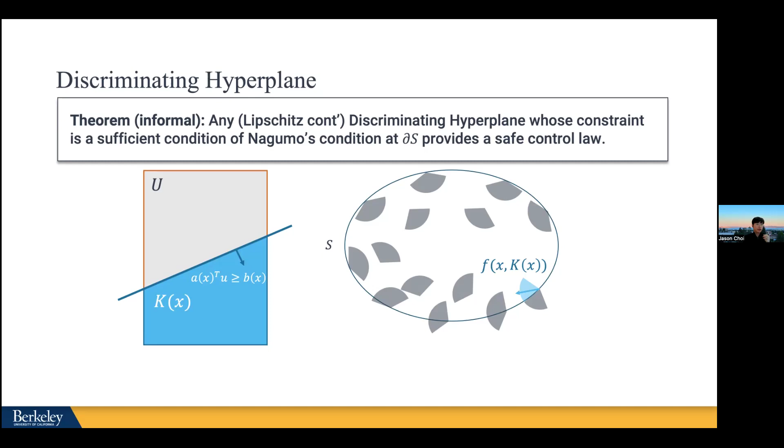And the main theorem, very informally stated, is that any discriminating hyperplane whose constraint is a sufficient condition for Nagumo's theorem on the boundary provides a safe control law. You can almost consider this a slight extension to Nagumo's condition, because Nagumo's condition is only defined at the boundary. So the first key feature is that this extends Nagumo's condition to the interior of the set. It also generalizes Hamilton-Jacobi and CBF-based safe control laws for control-affine systems—you can say reachability-based optimal control and the CBF barrier constraint are specific instances of these discriminating hyperplanes.

And the best thing about this is that it doesn't depend on any specific type of safe set representation. In theory it could even apply to, for example, predictive control-based formulations where you don't have an explicit distance-like function such as H. And it can be learned without models, through supervised learning and reinforcement learning. I won't go into how we design the learning problem to learn A and B—I'll refer you to our paper. But what we did is define this notion of a discriminating hyperplane and learn it through data, from a black box dynamical system without knowledge of the dynamics.

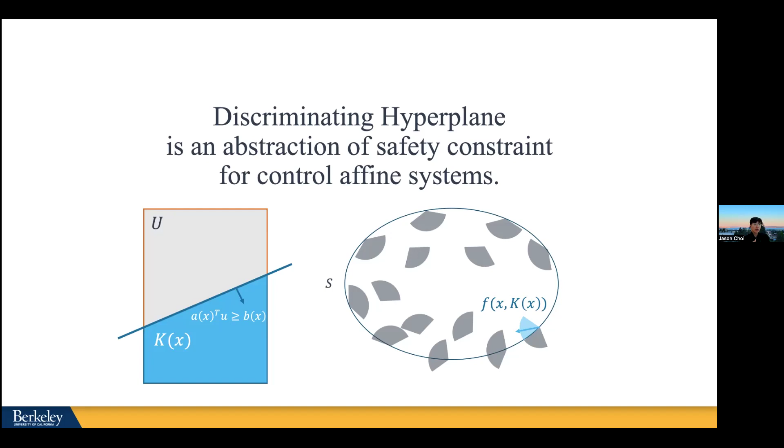My final takeaway from this domain is that control invariance is a fundamental principle for all sorts of safety filter design. When you think about how to do safety filter design, this is the first thing we always have to think about.

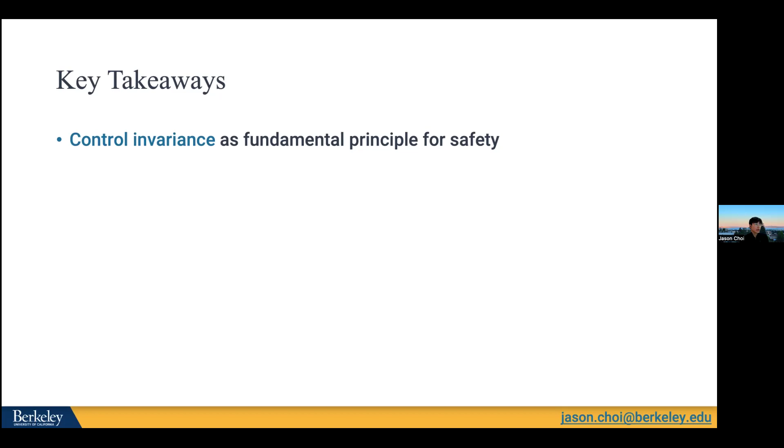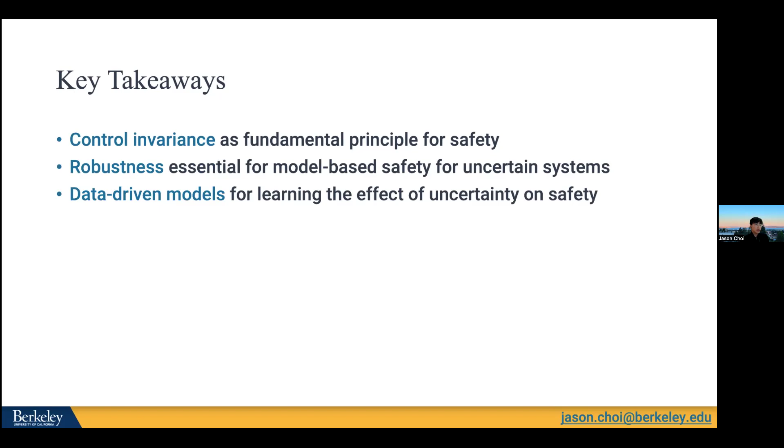The second message is that when you want to extend model-based safety design to uncertain systems that involve model error, making sure the safety filter is robust to this error is essential. For data-driven models, it's not only important to quantify the uncertainty of the dynamics, but also to quantify how that uncertainty affects our safety constraints. That's how I used the data-driven model in my GP-based safety filter.

And finally, wrapping up the discriminating hyperplane part, a geometric abstraction of the safety constraints could remove dependency on any specific choice of barrier function. I think in general this gives much more intuition of how the safety filter works and how, geometrically in the state space, this filter would work.

With this takeaway, there are still many open problems in this research topic. For example, one thing we haven't covered today is how these safety constraints hinder the system from achieving its task, or how we trade off between multiple task objectives or multiple safety constraints. It's a tricky topic because now we have to deal with multiple objectives and constraints. There are really many open research topics I want to keep exploring.

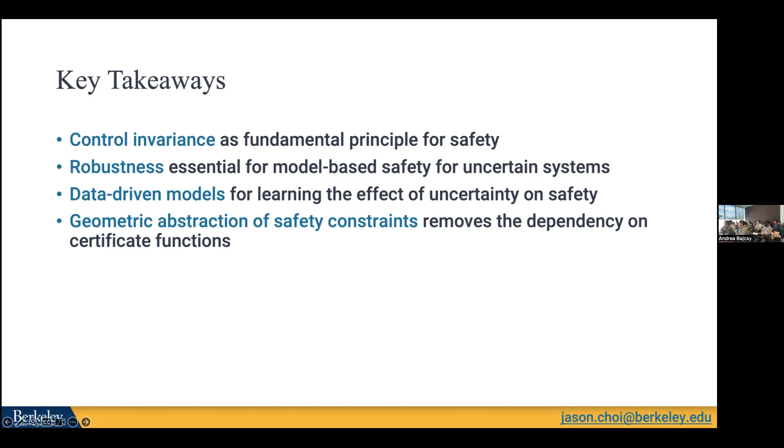Anything else on your mind? Yep, back to the discriminating hyperplanes thing. Is the idea that given a control invariant set, that's all you need? And once you have this control invariant set, you can just learn these discriminating hyperplanes on the boundary. You mentioned this hyperplanes thing being applied to model-free methods, but how do you ensure you have a control invariant set without having a model of this stuff? That's a good point. So how do we design control invariant set without a model? Is that the question? Yeah.

So actually in the paper we have a remark saying that certificate function is still useful to verify control invariant set. The point I want to make is that it's not that certificate function is not useful at all. It's still useful as a way of representing this kind of control invariant set, but it's just that maybe it's not the only way of designing the constraint, the safety filter, the control policy.

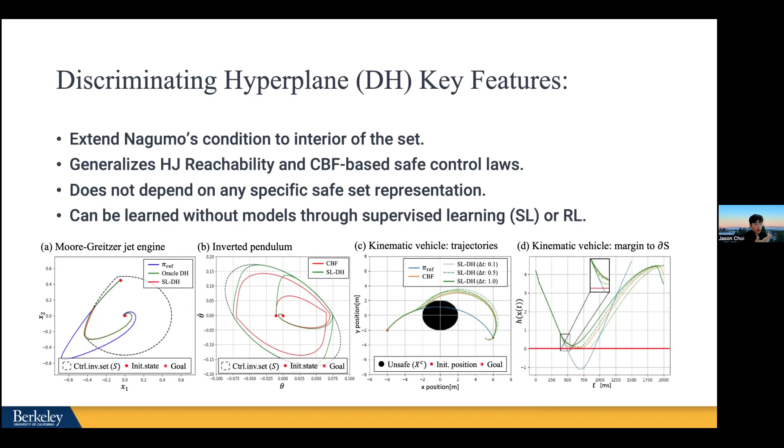Another thing is the supervised learning framework in the paper uses knowledge of the control invariant set, and that could be limiting because those control invariant sets might have to come from some knowledge of a model. But the reinforcement learning based framework we made, applied to this half-cheetah example, doesn't need any representation for control invariant set. We don't need to design it a priori. We just learn it implicitly through simulation. So even in the model-free setting, without any knowledge of the control invariant set, this works because we know the safety filter has this structure. We derive the structure from our model-based control theory tool, but then use that structure in a model-free way.

I have another question. In the discriminating hyperplanes work, I'm assuming you need coverage of both positive and negative examples, on either side of the hyperplane, to learn that boundary, right? Yes. So my question is, if I have a high fidelity simulator, I can do safe rollouts that show evidence of both situations.

But let's say I collect data in real time, like I actually deployed a system. Most of the time I'm not seeing safety violations—they're very, very infrequent, especially with a high performance controller. So do you have a thought on how this method would perform, or what an extension would look like if you don't have balanced coverage of samples in each part of the hyperplane region?

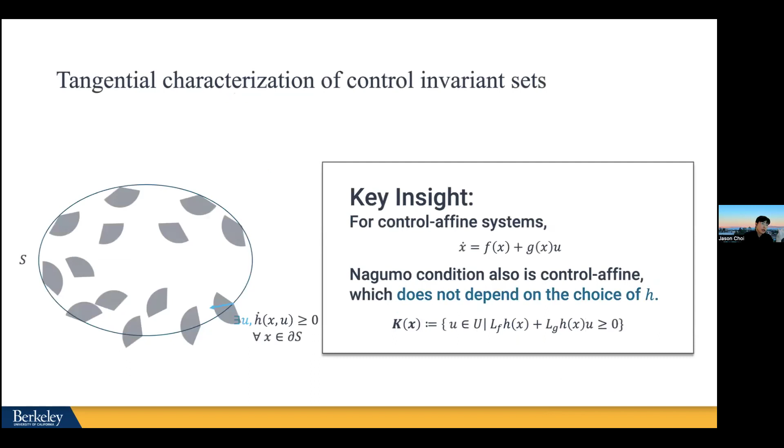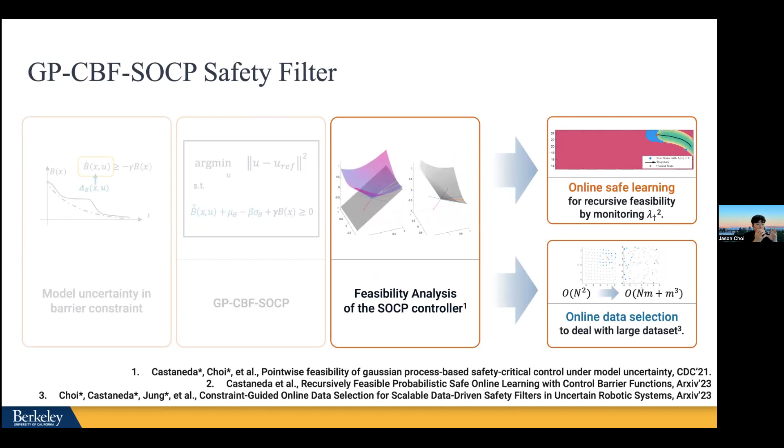And for those cases, I would go back to those GP-based safety filter designs, where we can still do some online safe learning while guaranteeing safety. We made a way of doing that. But for discriminating hyperplanes, we still haven't figured out a way of learning a safety filter without unsafe actions.

One more thing—if we only have safe data, we can consider the safety problem as keeping a learning-based policy within the distribution of the data. Katie, who is co-advised by Claire and Sergey Levine, did some work on that. I collaborated with her, and we used almost a reachability formulation to come up with an in-distribution invariant policy. So you can reformulate the safety problem as a staying-in-distribution problem.